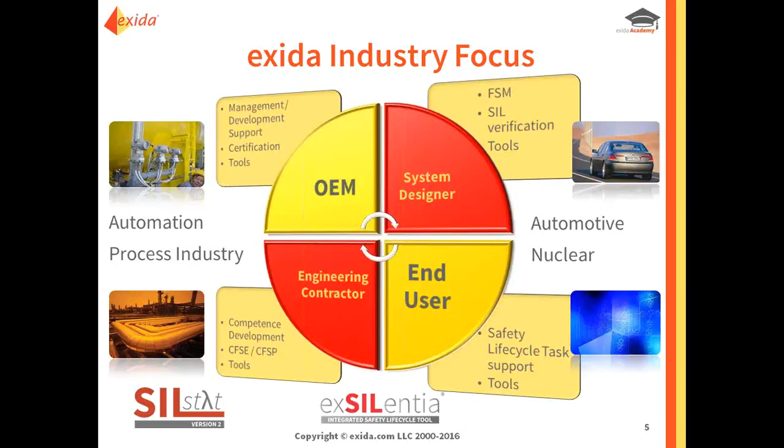exida is involved with the complete supply chain of functional safety in multiple industry sectors, anywhere from the original equipment manufacturer who required the product certification all the way to the end users that use the product. Now, exida, we do provide software tools, training, consulting, and procedures related to functional safety, security, and reliability. And you'll see here are our main products in 6 different categories. The first one's consulting. We do end user work for process safety, normally to IEC 61511. We also work in 62061, which is machinery, and also ISO 26262, which is automotive. You'll see we also do alarm management and cybersecurity.

Next, you see we have engineering tools. The main tool that everyone loves is exSILentia. This tool just makes everyone's life easier, including ours. Not so much manual labor anymore. Now you can just enter your numbers and have the software do the work for you to minimize any errors. You'll see here we have a whole slew of different products and tools that we can offer. And then today's webinar will be on the product certification, the IEC 61508 certification. We have cybersecurity certification as well.

Next, you'll see in training, we basically offer training somewhere in the world at least once a week, and trainings will be increasing more and more. One of the biggest initiatives for us, like I said, is now that we do have a sound room, we will be working on online training, which is very exciting to help those who aren't able to travel across the world or travel to a different state to sit in live. Obviously, I believe live, in-person training is the best training that you could get. However, if you can't spend a week out somewhere training, then this is the next best step, and so we're helping fill that void.

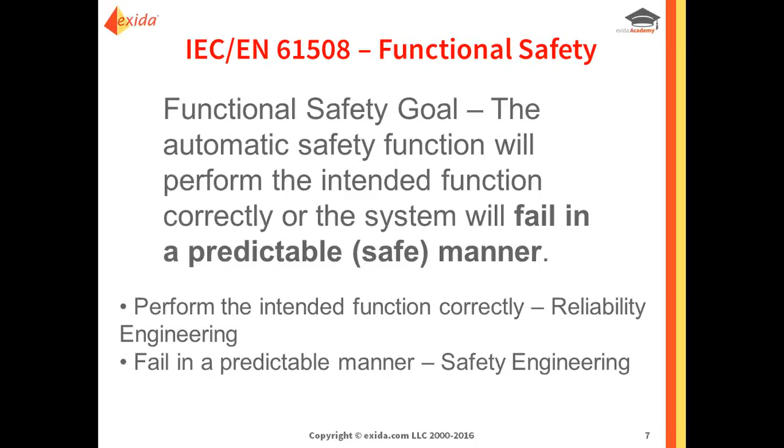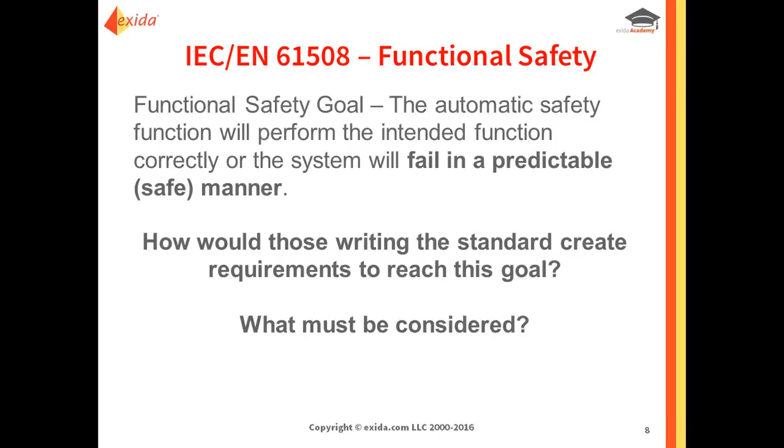And so that's the biggest goal of functional safety. So you want to perform the intended function correctly, which is your reliability engineering, and then you want it to fail in a predictable manner, which is your safety engineering. Now, how would those writing the standard create these requirements to reach such a goal? Where would you start? What needs to be considered? And if any of you haven't seen the IEC 61508 standard, it's quite big, and it's an undertaking to learn and understand the standard. But that's what we're here for.

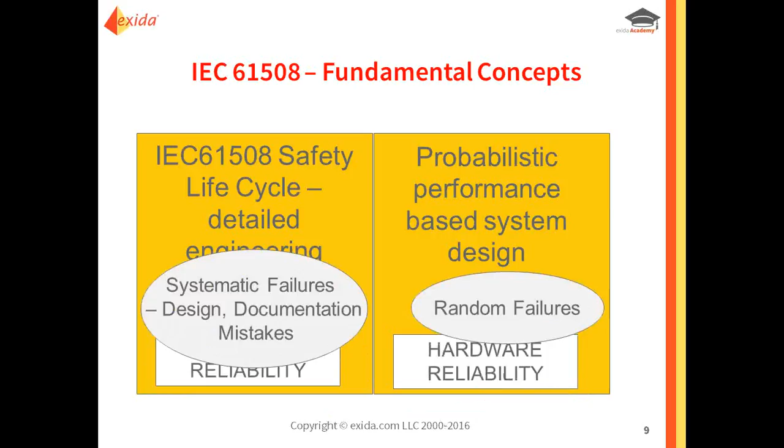So you'll see here in front of you, there's two fundamentally different issues. You have systematic failures, including design faults, document errors, and lack of training competency. And then you also have your random failures, which are more commonly in hardware reliability.

Now, IEC 61508, the basic safety publication, is an international performance-based standard for all industries, so it's a global standard that's recognized all over the world. It's large, it's complex. It was written for a bespoke system, which is basically a turnkey system. Now, there are hundreds of requirements in parts 1 through 3 which are written to achieve the functional safety goals of reducing both random and also systematic failures.

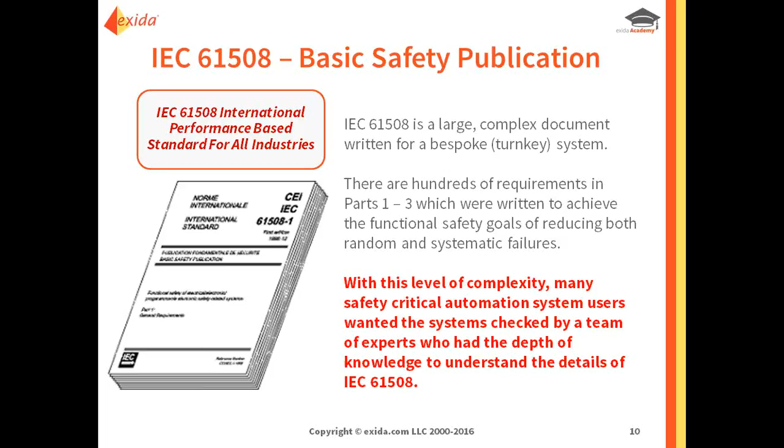With this level of complexity, many safety critical automation system users wanted the system checked by a team of experts who had the depth of knowledge to understand the details of IEC 61508, and that's where this all got started. Okay, how did certification programs come to be? Well, functional safety certification programs were pioneered by two TÜV companies in Germany. This is back in the 90s. They used a different standard at the time. This standard was VDE 0801.

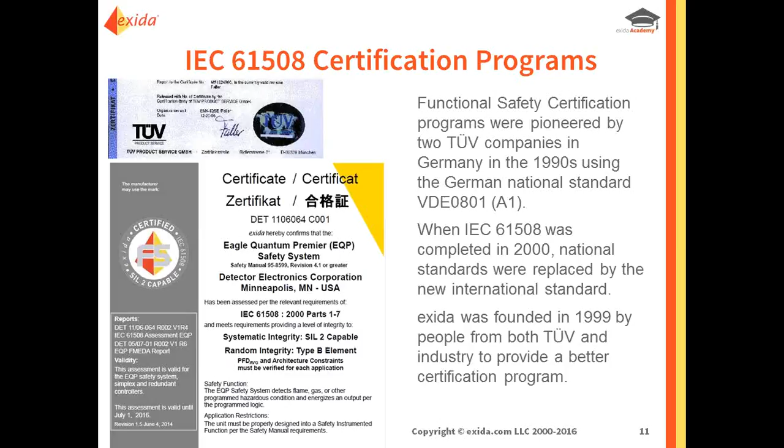Then in 2000, IEC 61508 came out, which completed it. The national standards were all now replaced by new international standards because functional safety grew so fast. Exida was founded in 1999 by people from both TÜV and also from the industry to give a better certification program, and that's where it all stemmed. So what is certification? We'll get examples of why and how product certification will help manufacturers and also end users.

Okay, so certification can be what? You can certify systems, you can certify products, components, you can even certify personnel, which is one of the fastest growing certifications out there. Why? Because many companies see the need to have somebody within their organization be that functional safety expert. And without one, you run higher risk because you don't have anyone in there making sure things run through smoothly like you would a quality manager. So now we have functional safety leaders that are within companies.

The certification is a third-party review that's done against a set of requirements, which are now called a scheme per the standard, and these are based primarily on international standards. Functional safety certification involves a detailed analysis of two different things: the engineering process and the design margins, which results in random failure rates in all failure modes. So it's not just about the PFD average, it's about all the failure modes, whether it's fail safe, fail dangerous, if it's detected, if it's not.

And then also, because of the growing need, and I'm sure many of you have seen it from day to day, cybersecurity threats. Now cybersecurity certification is also a growing need, which will involve a detailed analysis of the engineering process, cyber defense mechanisms, and network robustness.

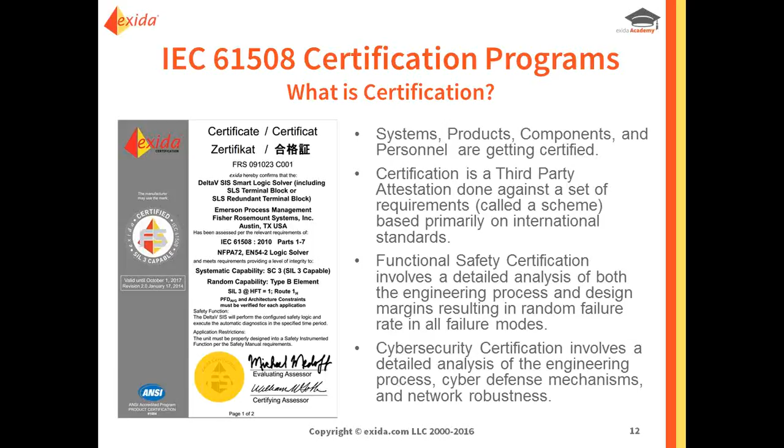Okay, so now that you know kind of what certification is, who does certification? Today there's many different certification programs that have been established by many different private companies. Even some governmental bodies all over the world have this. And all organizations who perform certification should be accredited for their field of work. That's very important because those who have done their research will know which bodies are accredited and which ones are not. And if they're not accredited, that means they follow their own standards, they do what they feel is right, and nobody's there to judge them or to audit them. Okay?

So a certifying body, if they're accredited, they now have to get accredited by, in the United States, someone called ANSI, the American National Standards Institute. It's the United States IEC liaison. However, that's for the United States. But let's say, hey, I got the certification in the U.S. Now, how does it get recognized in Germany? How does it get recognized in the U.K.?

Well, ANSI, who's the U.S. liaison, is a member of the IAF, which is the International Accreditation Forum. Most countries around the world are signatories of the IAF, which then creates a multilateral recognition arrangement which assures global certificate acceptance around the world. So that's how it all pulls together. So when someone says, yeah, I'm accredited by ANSI, you don't have to worry. That is now an accreditation around the world. Okay?

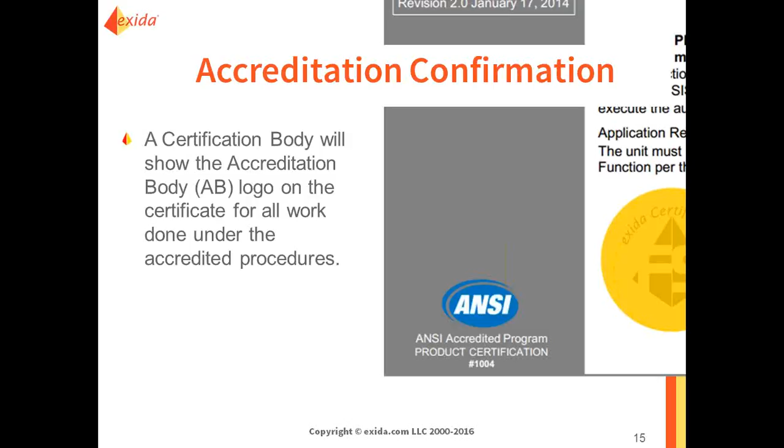Here, as you see on one of the exida certificates, we are accredited by ANSI. You can see our identification number right there, 1004, and we get audited every single year, and everyone loves getting audited.

All right, so the exida scheme. Why do we have a scheme? Well, when we first got started, you have the standard IEC 61508, right? It's the family of standards. It's the umbrella standard. However, once you get involved in functional safety, more and more areas need to be improved that the standard can't touch.

And that's where we've developed an advisory board filled with end users. And they let us know, hey, look, exida, here's what we see, here's the certification. How do we get reassured about this, or I need these failure rates, how do I have that? Or this cybersecurity audit, what can you do about that? So from the recommendations of the board, exida then has to appease the board, and that's where these extra items come from.

And this is why we feel exida, even though we're one of the hardest schemes out there, we're the ones that are ultimately helping the end user to the maximum. We're going to give them everything they could ever want, which will then do what for the manufacturers? Will increase the manufacturer's sales, because that end user now has everything they need when that manufacturer gets their product certified from exida. So what are those things here?

It's the FMEDA analysis, right? You're going to have the accurate failure mode data based on over 150 billion unit operating hours of field failure data. We're going to publish field failure rates, not just that PFD average that you see from most other certifying bodies.

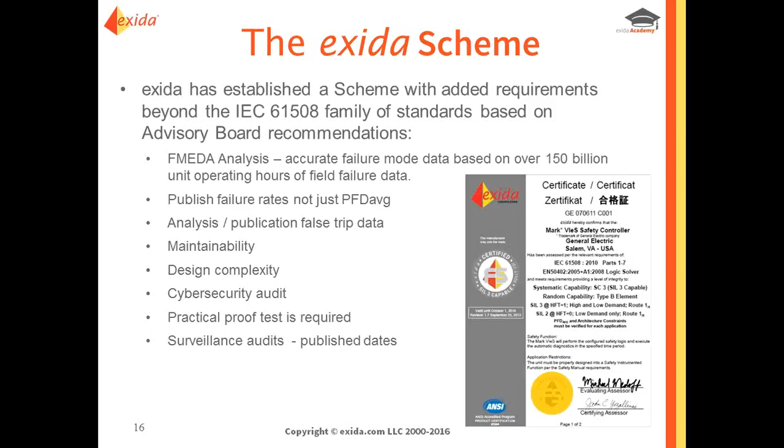Okay, this next section I want to start talking about. I got 4 examples on why people like to get their products certified. And it's more than just saying, oh, I'm certified, as a marketing initiative. There's more to it. There's more cost savings involved with a product that goes through certification than a product that doesn't. And you'll see here I got 2 examples with Dow. In a valuable paper, engineers from Dow made a point of discovering a flow meter failure in operation where the output was locked.

A certification scheme with an FMEDA, what would it do for them? Well, this looks at every single failure mode for every single component and will find possible design flaws resulting in a locked output. What does this mean? When this flow meter failure was in operation and went to that lockout phase, what if they could have had an FMEDA done and found this problem before it even happened? When are problems the least expensive? When they're already in production, or when they're still in design mode? When do you want to redesign? When do you want to recall?

So that's the biggest thing, it's better to find something before units are deployed in the field. And that's from a manufacturing standpoint, and also from an end user standpoint. If an end user buys something assuming it's going to work correctly, and they put it in the field, how much time and effort are you going to waste if it doesn't work correctly?

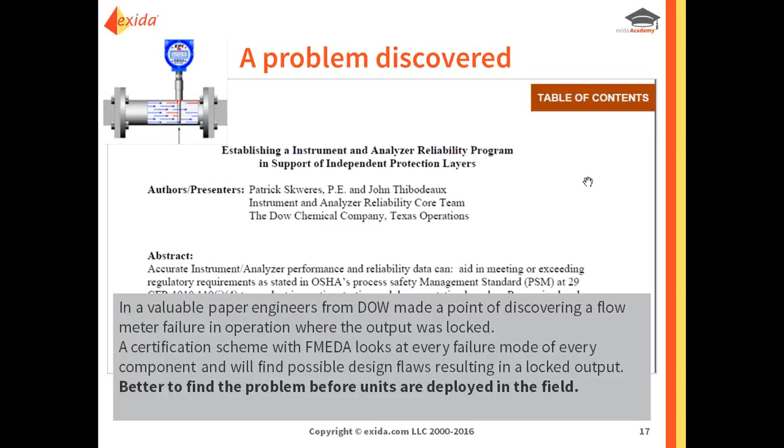Here's another example. Engineers from Dow also discovered hardware and software design faults in a nuclear level sensor. The field failure data convinced the site to replace the device with a different manufacturer. And I think that's very strong, because before they even had to worry about putting this into the field, they ran the field failure data. They found that there was other information out there that was better, and instead of taking that risk, they switched the manufacturer. And that's what a good certification scheme will do.

We here at exida use something called a safety case, where the hardware and software design process is reviewed in extreme detail using all of the IEC 61508 requirements. And through this process, in many, many different situations, hardware and software design faults have been discovered and repaired prior to certification, prior to deploying anything in the field.

And even if something's in the field, mind you, and they want to get certification, that's still okay. We'll still go through the same rigor. If something is found, wouldn't it be better for the manufacturer to find it before that customer who needs to rely on this product and needs it to work every single time?

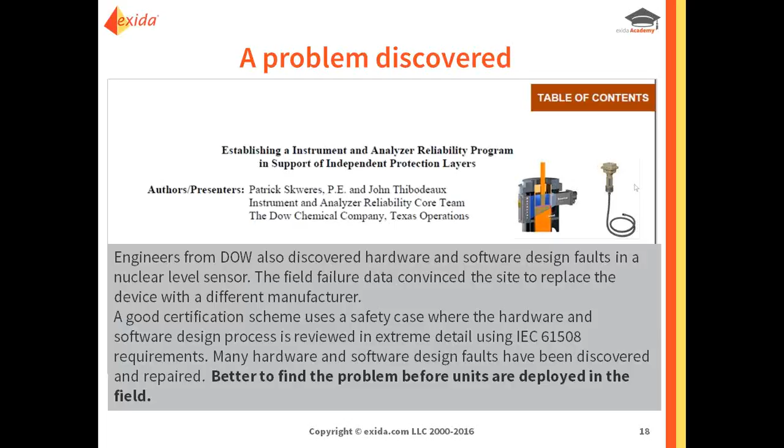Here's another example. At final validation testing, an evaluating assessor from a certification body asked to witness a series of tests. What it was going to do is verify that all claimed diagnostics were operating. One test failed. It's discovered that the optimizing compiler automatically eliminated the RAM memory test as its algorithm determined that the test had no value.

That's very interesting, right? I mean, how would they have noticed this without somebody? Because a lot of people take things for granted. They said, yeah, this is great. But when you get that other set of eyes that comes in, certifying bodies almost look for problems, right? As all auditors, as you know from history, they always look for problems.

We do it as well, and we always try and find something so that we can help make that system stronger. So you're not only getting a certification, you're having somebody come in looking for ways that it could fail to help save you in the long run. And so because this was found, the product was redesigned before the production release.

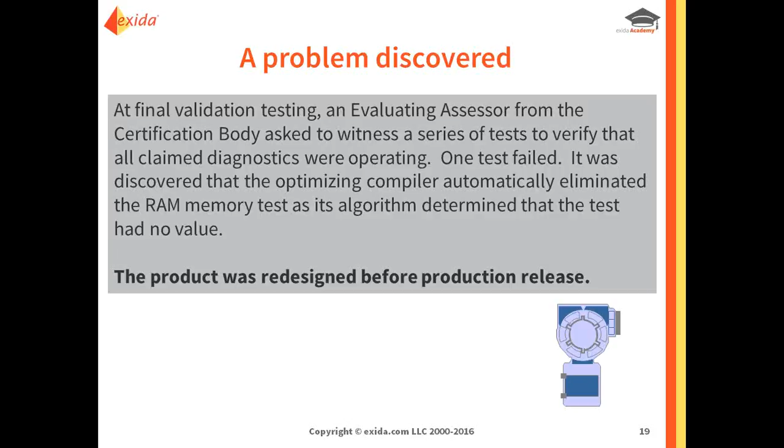And here's a final example. A dangerous failure occurred in the final element assembly. The solenoid valve was de-energized, yet the ball valve did not close. Another layer of protection went ahead and shut down the unit. When the final element assembly was tested after shutdown, it worked perfectly.

So basically, to meet IEC 61508 requirements, what do we have to do? All engineering tools must be checked for proper function and qualified for use. So for this situation, it was discovered that a mechanical CAD tool inserted default tolerances during a tool upgrade. If someone didn't re-look at this, how would they have known this would have happened, right?

And so that's what we do. We went in, we looked. We found the tolerances that were set to default. Those tolerances caused that valve to bind at a high temperature. Long story short, it was corrected, everything was fine, and it worked perfectly. And that end user was a very happy customer because now their system operated correctly.

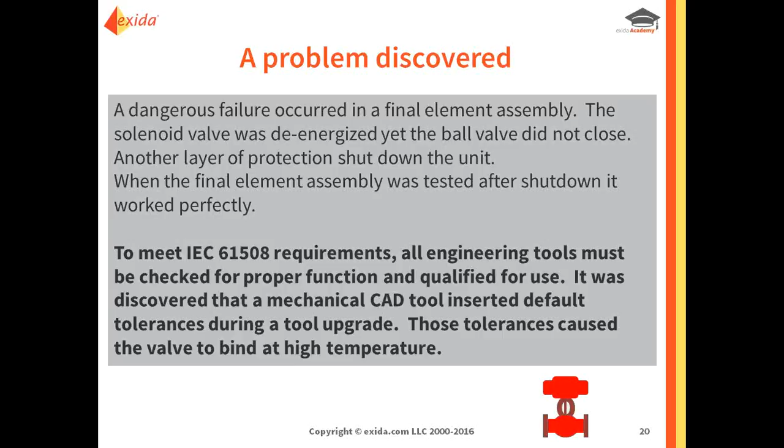Because I think one of the biggest pains in their side or hurdles that we hear from the end users, manufacturers, customers, is spurious trips. When something fails and it shouldn't have failed, everything was fine. All that does is create headaches and production loss.

So when you go out there and you're looking for a certifying body, you need to ask some questions to make sure that who you're getting is what you want and is it worth the value, because everyone charges a different amount, some higher and lower. I think exida, we're not your lowest company. However, we do so much more than most companies.

So if you want to spend all the time doing the work, that's fine. However, we do most of the work for you so that you can go off and do your job, and certification doesn't become a hurdle, doesn't become a headache. It really just becomes something where you let someone else go through and analyze all of your products.

But anyways, here's some bullet points. Make sure that with a good certification scheme, they use a safety case to ensure completeness of the assessment so that they don't miss anything for you. You want someone to carefully examine the entire mechanical, electrical, and software design. You don't want them just spot checking. You want to make sure they go through everything. You've got to look for completeness.

You want to make sure of correctness. The documentation quality has to be there. There's nothing that they can bypass or miss. Okay, the design process must be documented with checking procedures. Engineering tools and tool upgrades must be qualified. Staff competency must be evaluated and documented.

No, they don't need to go and get a CFSE or a TÜV expert or TÜV engineer, anything like that. They just need to show competency in that specific role that they're working in. If that technician needs to be certified, or if they need to be skilled in welding, then we need to see that training that has been taken for that individual to meet his job, right?

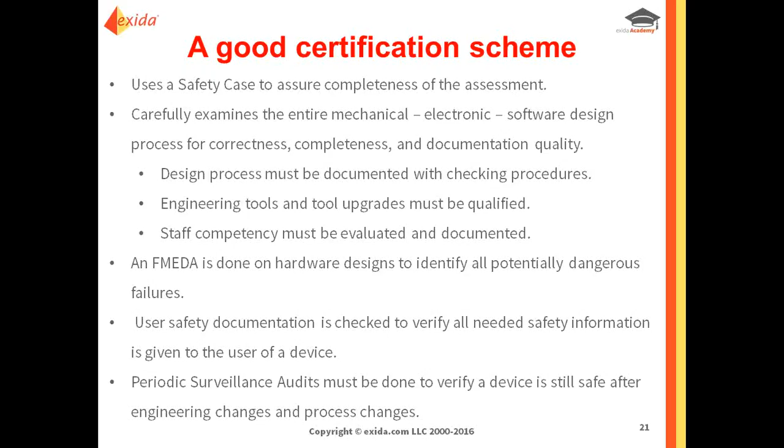The safety case. At exida, we've always used the safety case approach. As many of you know, and I see a lot of familiar names on this call today, there are so many requirements in IEC 61508. I can't stress that enough. There are hundreds and hundreds of requirements that you need to go through with a fine-tooth comb to make sure you meet every single one. Because you never know when that one requirement is going to open up a can of something you missed, or a product that, hey, look, we need to redesign this because of this one requirement. And it's to create a stronger, more robust system.

Okay, what exida does is we want to make it public. We want those assessment reports and the certificates all on the website. We have a site called SAEL, and this is probably a gold mine to all end users. They now have a place to go to. Not just our certified products, but even other certifying bodies' — we put those certificates on this website when we get access to them. So now an end user can go to this site and make sure that they're building the best system possible from all certified products out there.

What's very nice for the manufacturers is if your product is on this site, now all of a sudden all of these end users from around the world see your product, can click on the link, can go inside, and when they want to purchase or want more information, they click on a link that goes straight to that manufacturer's site to help them know where to go to buy what they need.

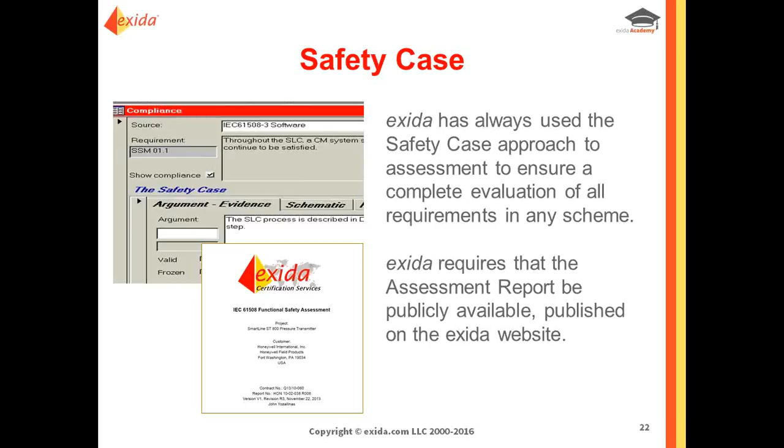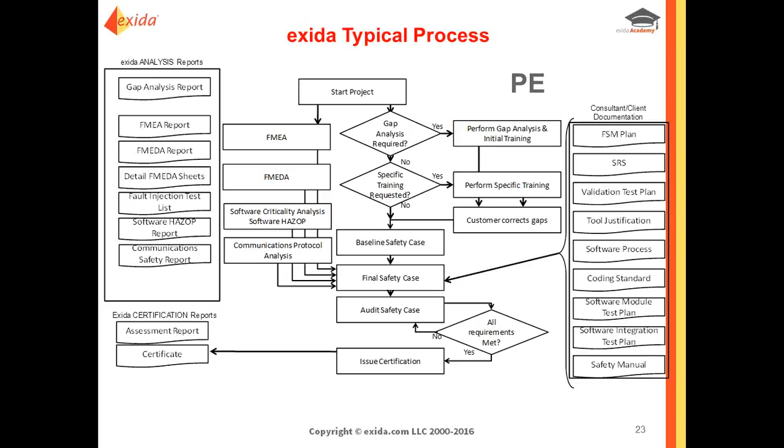The FMEDA report will stay private with the manufacturer, and the end users can always ask for the safety manual and the FMEDA report if they do need more information when they start setting up their systems. So that was kind of in a nutshell what we do for product certification.

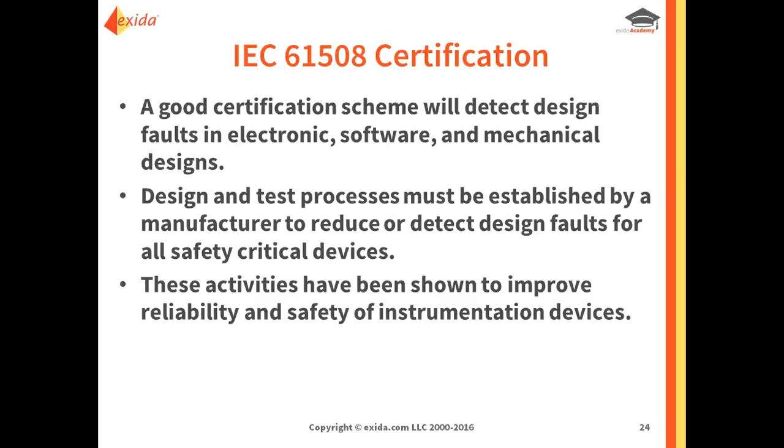And I did talk about this briefly, but with a good certification scheme, we detect the design faults in electronic, software, mechanical designs. Design and test processes must be established by a manufacturer to reduce or detect design faults for all safety critical devices. And finally, these activities have been shown to improve the reliability and the safety of instrumentation devices, and that's very important.

To me, that's huge. It depends on what you put this system in. Maybe you don't need or even worry about spurious trips, but most people do. You're going to now have increased safety. You have fewer field failures because you now have a product that's been looked through with a fine-tooth comb. That system is now going to become more robust.

And I always like to say, and I make this important, that third-party review, there's nothing like having a non-biased review of a product that you're going to go buy from someone outside of the company you want to buy from, because that company thinks that their product is the best. Everyone thinks their product is the best. That's why you make that product.

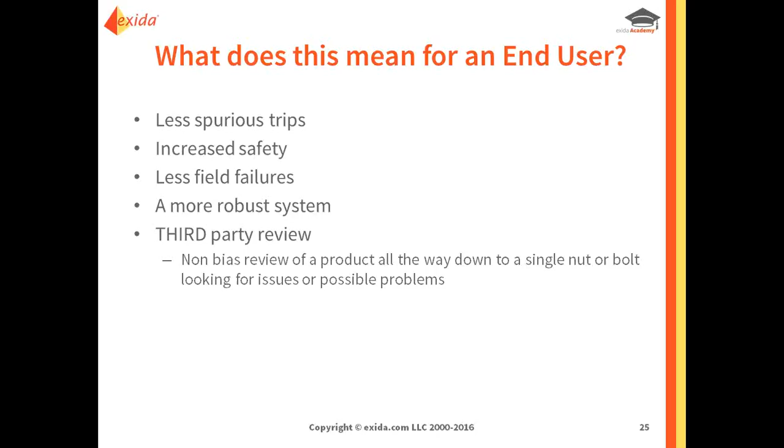But now you have somebody on the outside looking in at them, trying to figure out, okay, is it the best? And then they're going to go down to the single nut or bolt. They're going to find all the issues that they possibly could find and help you out so when you do have this product, it's as robust as it can be, and you're going to see reduced failures.

So what does it mean for the manufacturer? Okay, now the end users are happy because they see the product certification. What about for manufacturers? Why would manufacturers get their product certified? Well, the first thing is you now have somebody coming in that's outside your company to help you figure out, okay, was this designed correctly? Are we going to find faults in this design? You're going to now have a lower life cycle cost, which is very important.

The next thing is, because you went through this rigor, you paid a little bit more money up front, you now will have the ability to have an increased market, increased sales. A lot of manufacturers have a non-certified product and a certified product. The certified product will cost a little bit more. Why? Because they went through the due diligence of getting that product certified. So now you will have that capability.

The next thing we've seen is, well, obviously you have an increase initially, right? So this cost, let's say, is X. Well, because you spent X on the certification, you now have a lower risk and increased savings over the long term. How? Because now, by statistics, it shows that a certified product will fail less in the field, so you're going to get fewer returns, unless, of course, the end user uses your product incorrectly, because you can't help that.

You're going to have to worry less about recalls. It's going to have a lower risk of any kind of recall, redesigns, less rework, so reduced failures at the manufacturing site and in the field. And so these are just different things to think about that we here at Exida didn't think of at first, but now after doing this for so long, we're starting to see all these different benefits that people can have when they certify a product.

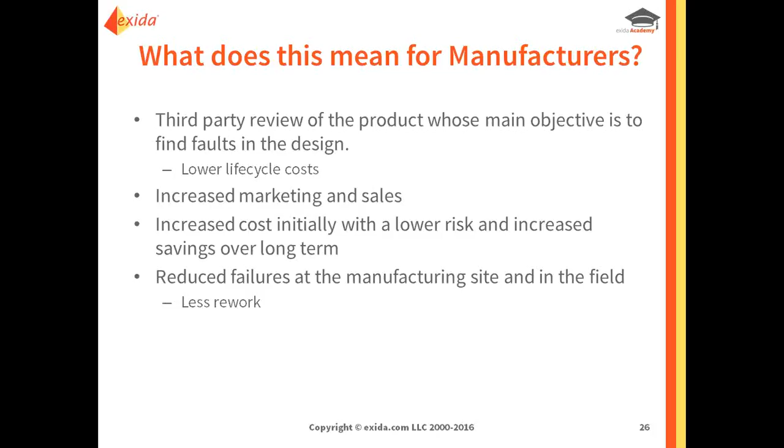This morning I think we got a list of like 5 or 10. They just want to say, hey, can we certify these things? And as we went through it, no, you're not looking for it. But what you do want to look for are these other things, and we'll try and help them with knowing what other items they should look at if it can't get certified.

Okay, so now I finished that portion. I hope that information was helpful. Let me go and see if I can find these questions. One moment here. Great.

All right. The first question I have is, why is the audit set to 3 years where TUV has a 5-year audit? This is a great question, and the only reason there is per the scheme, right? When we first got started, we were, well, I wasn't, but when we first got started, TUV was the first certifying body out there, okay? And when they first started, they said, let's do it every 5 years. There was no real science behind it. That's just what they felt.

As the industry was changing, they felt every 5 years was acceptable so that they can make sure they can stay up to speed, right? They're not accredited, which is okay, but that's what they wanted to do. When Exida got started, our founders, Rainer Faller and Dr. William Goble, decided, hey, look, 5 years is fine. However, this advisory board of the end users were the ones pushing, hey, look, 5 years is okay, but we would rather 3 years. It happened at the very beginning.

It's stuck. So every 3 years now, Exida will stay true to it because we know technology changes faster than every 5 years. When we were looking at it, it looked like every 3 years was probably that sweet spot when we felt people need to be evaluated. There's nothing more to it. It's not in any kind of standard, but as part of the Exida scheme, we've decided that 3 years from the beginning was the right amount of time.